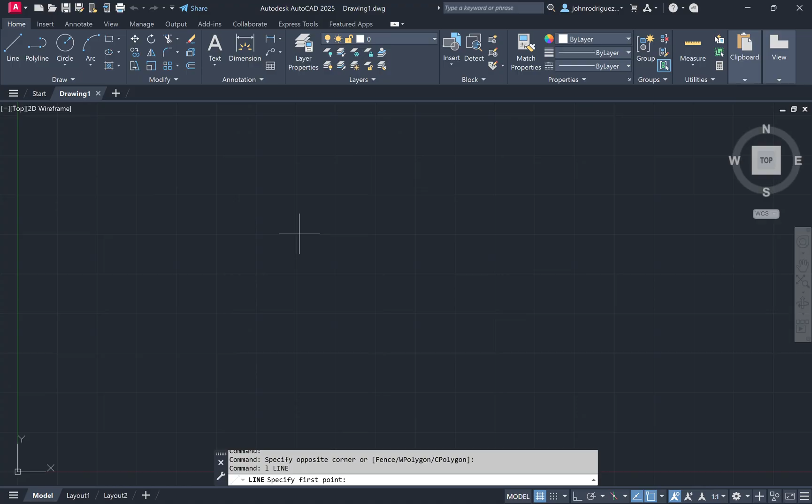For drawing 8, support bracket, the auxiliary. We're going to start with the front, top, and right, and then see if we can get to the auxiliary view. Line command, and we're going to draw the top 2 lines of this front view.

Turn ortho on. I'm not going to do any math. I'm just going to go over 30/16 because it's 15/16 two times. There it is. And then I'm going to go over 3/4. Okay, if we end up with 2 lines, we want to be neat.

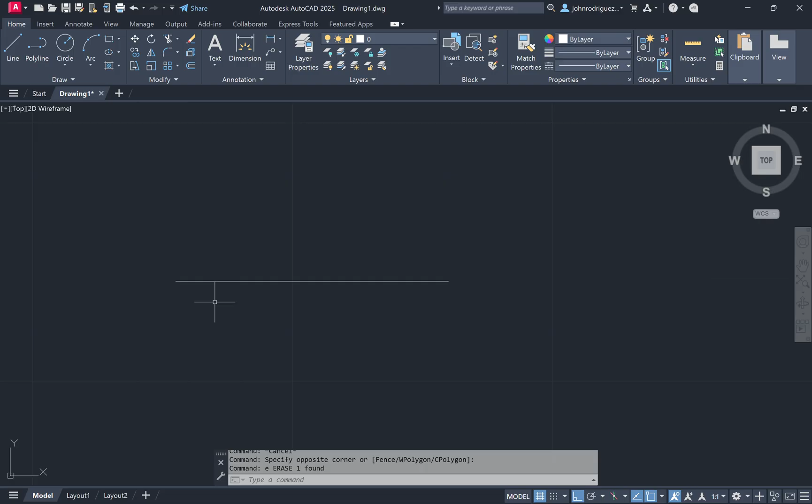So I'll just use the grip here and make this go over to that one and get rid of the double line. Alright, line command here. It goes over 2 and 7/16. Press enter, and then I'm going to rotate that.

If you know the polar method, use the polar method. Rotate that down -30 degrees. I'm going to use offset. My distance is 3/16.

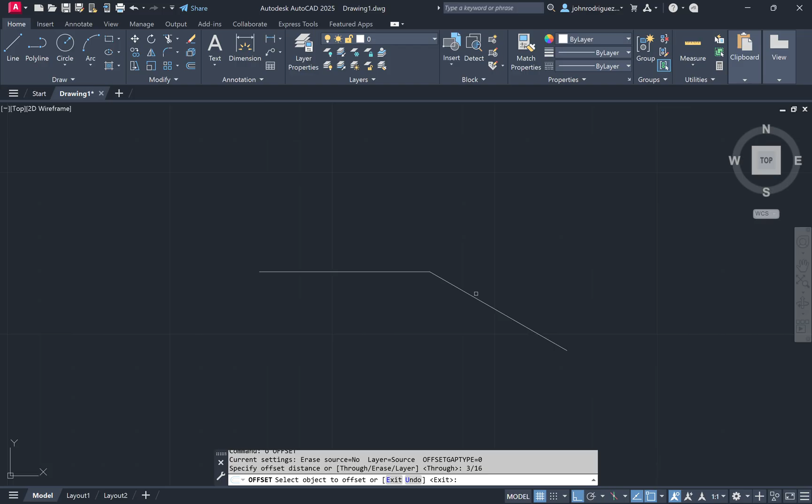I'm going to close this gap here. Let's trim this. Close this gap here.

For the chamfer, it is 3/8. So I'm going to offset 3/8. Wrong way, let's go that way.

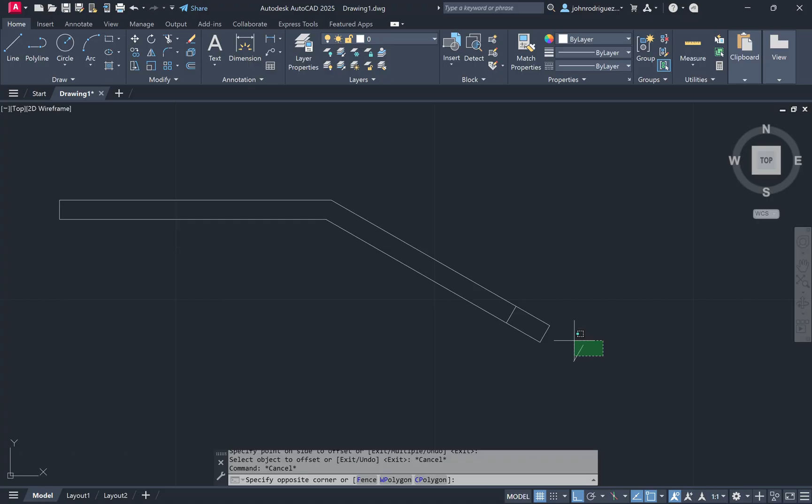Let's move this one, we need another one of those. If you didn't make that mistake that I did, just copy one of these back here. This is okay because we're going to get rid of this line in a second. But we're going to offset that, and this is for the back of the hole.

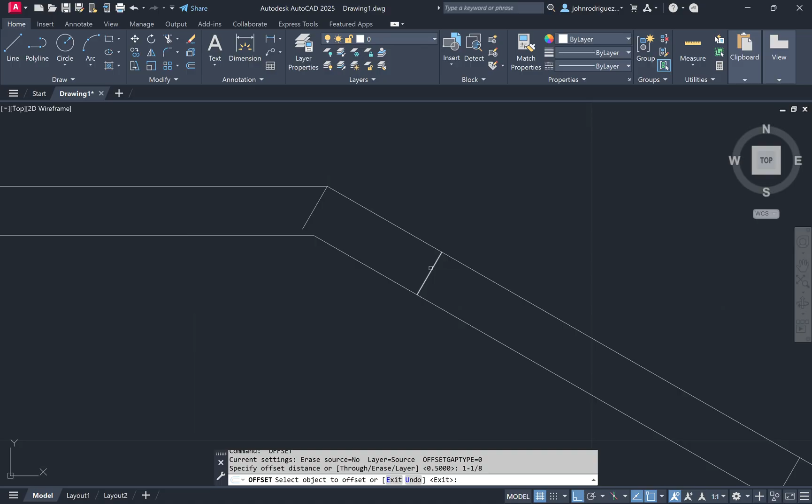It's away up from the top, 1/2 inch. So I'm offsetting this 1/2 inch to the right, and then get back into offset 1 and 1/8 this way. Now we can get rid of that.

We'll worry about the hidden lines for the holes later. If we want, we could change that to hidden now. Let's just make sure we go over that.

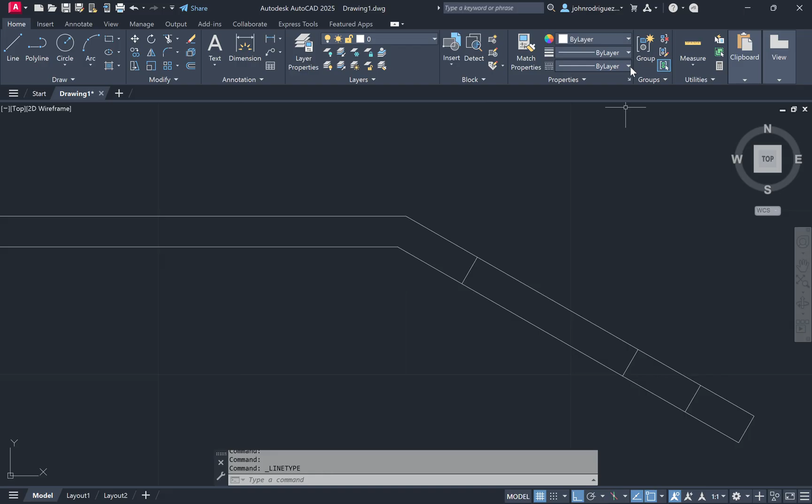Go other, load, hidden. Sorry, actually, there are 2 ways to do this, and depending on the next lesson I give you, maybe we're going to do it another way. Alright, let's just keep going.

I'll go back to that. Alright, I'm projecting up from this corner. This is going to be over. I'm just going to do a line from this. It was any length, right? 30/16. I'm going to offset this 1.5 down.

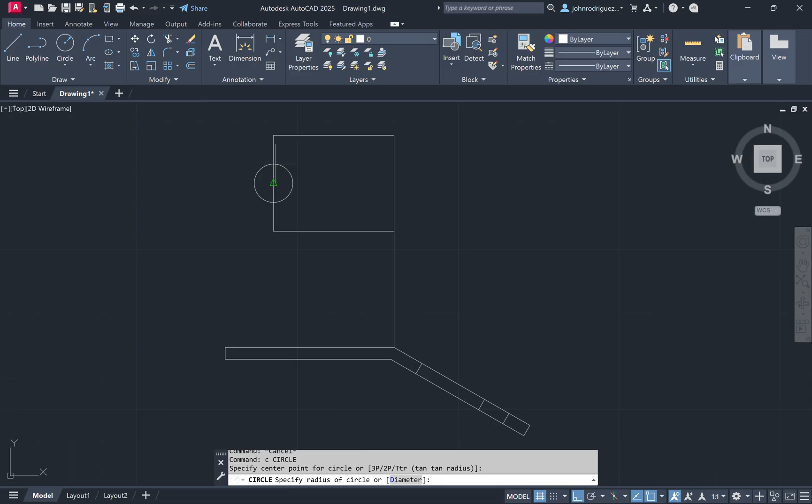I'm going to do a line here because I'm going to have to trim that circle anyway. Circle from that midpoint up to the top. Trim command, get rid of those 2.

I'm going to extend from this corner, the end of it, up. Wherever that is, I'm just going to extend these 2. That's the end of the shape.

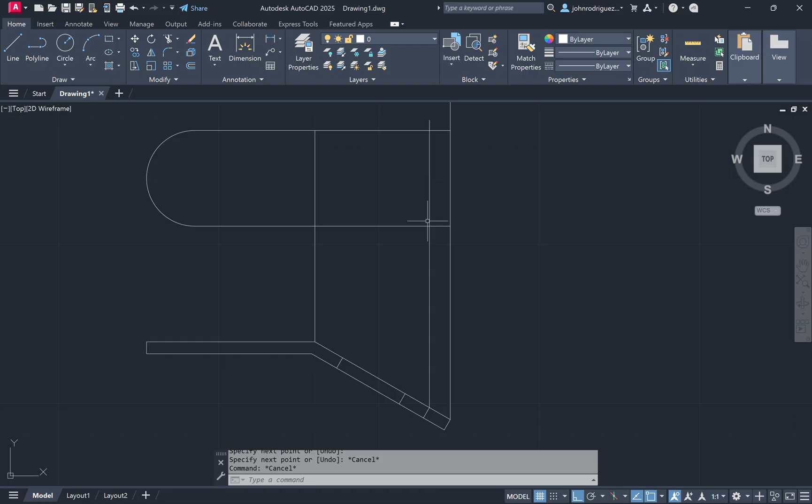Okay, then I'm going to extend from this corner here up. That's going to be where my fillets, where my chamfers start on both sides. Then I'm going to go line away from this corner up 3/8 and connect.

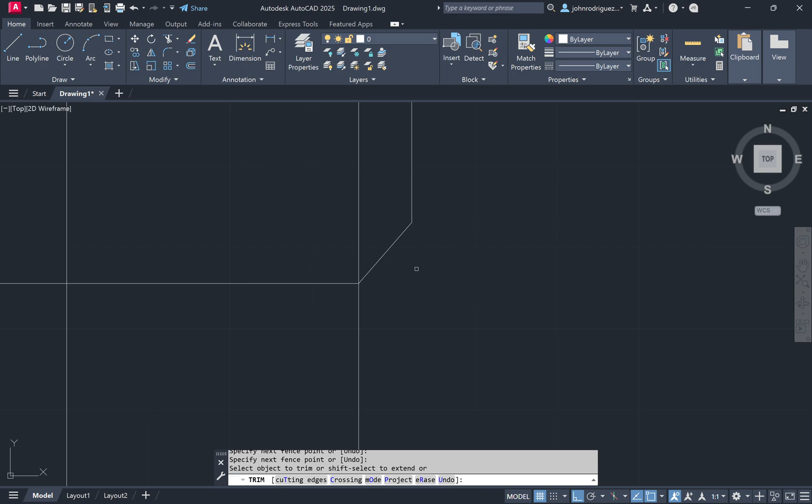I'm going to mirror this to the other side. I need some midpoints, so I'm trimming this out now. Mirror this away from here to there. Then we could trim. Right, we could get rid of this.

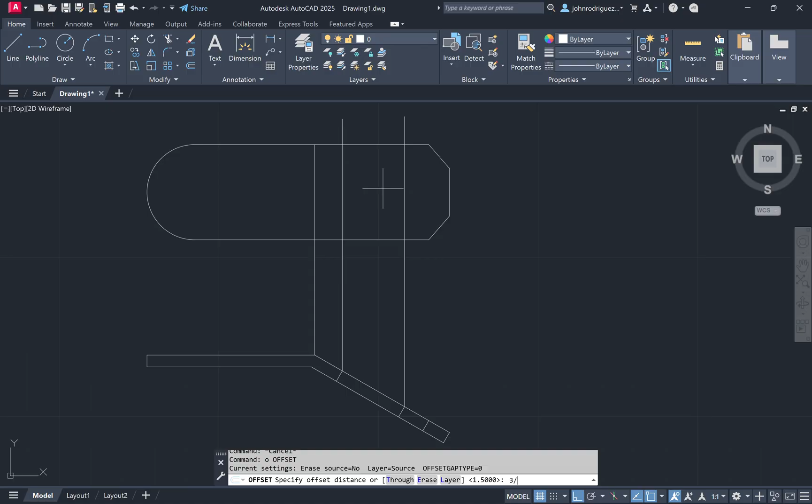Then for the whole top of this to the bottom of this, notice I'm dealing with the top of this side first. And then I'm going to deal with the bottom because that's going to do other stuff with the top view. Okay, then we can offset 3/8 from the top down and from here this way.

Let's start cleaning this up. Trim this out, trim this out, this. Let's go in a circle and get all of these out. Okay, let's get this circle, the 2 circles here.

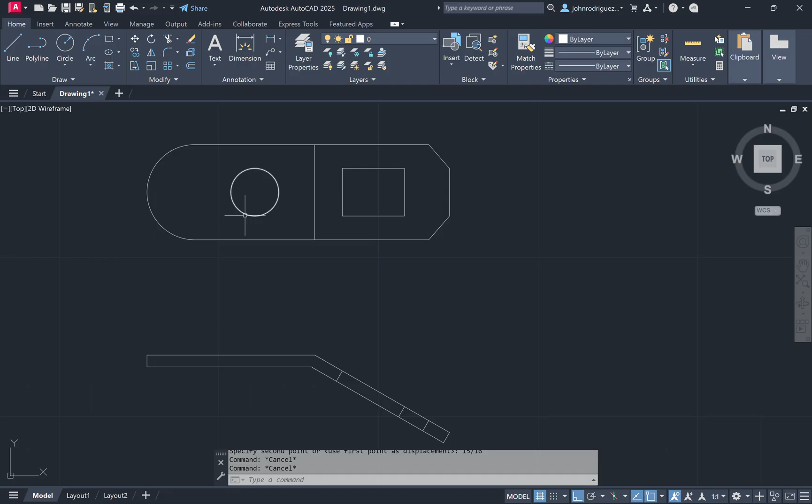I'm just going to do one there, diameter 0.75. I'm going to move it over 15/16, and then I'm going to copy this over 15/16. Alright, we can bring this down.

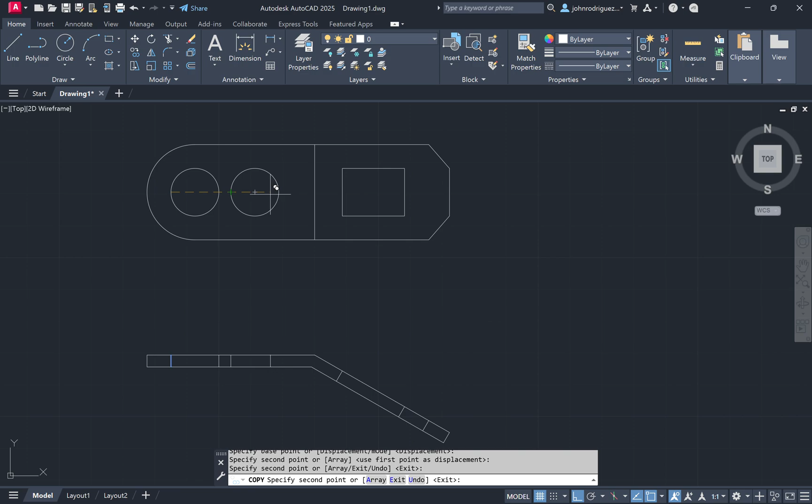And that's going to tell me where my hidden lines are. Trimming this out, and I'm going to take this, copy it from here to here to here to here. Alright, there it is.

Next, let's work on the right view. Actually, no, let's keep going with the top view. We want to get the hidden lines that go under here. Darn, let's see.

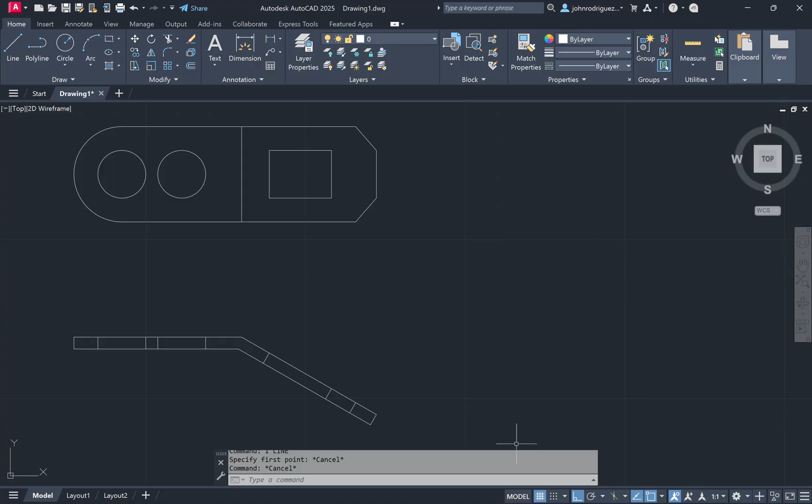We should be applying what's called layers. Yeah, we're going to go over that lesson soon enough. Let's just do this now.

Layers. We're going to type in LA, and then we're going to click a new layer. And then we're going to call this object. Press enter to type it to create a new one. Construction. Enter again, or click this icon for a new layer.

Hidden. Enter again to do text and dimension. Then I'm going to change my colors. Object is cyan. All of this is going to be posted, so you guys should be able to create this.

Construction is yellow. Hidden is going to be green. Text is going to be magenta. And dimension is going to be red.

Click OK. And then on the line types, construction, on the line type, I'm going to click there. I'm going to hit load, click in here, and press D for dot. I'm going to go to dot, not dash dot, regular dot.

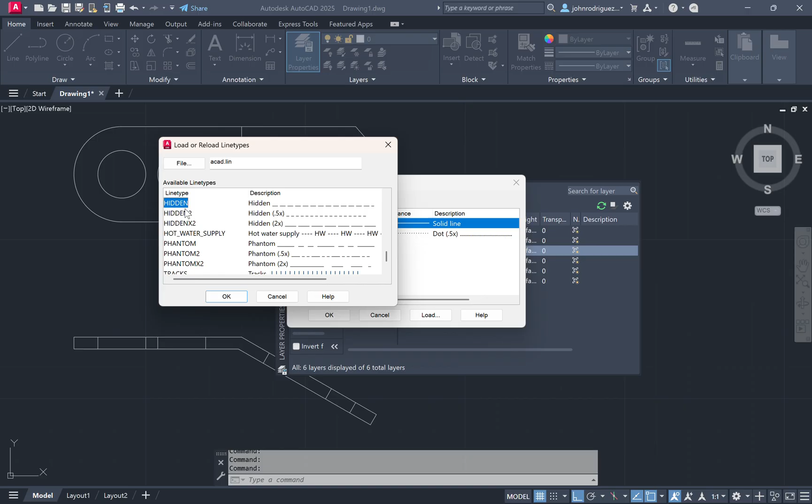Set the scale to 0.5. Click OK. Now I'm going to load the hidden linetype. Click here, type H for hidden, select my regular hidden linetype, and click OK.

In construction, double click, and I'm going to set that to 0.5 or 0.2. Hit OK. For hidden, I'm going to set that to green. Hit OK. Now our layers are set up.

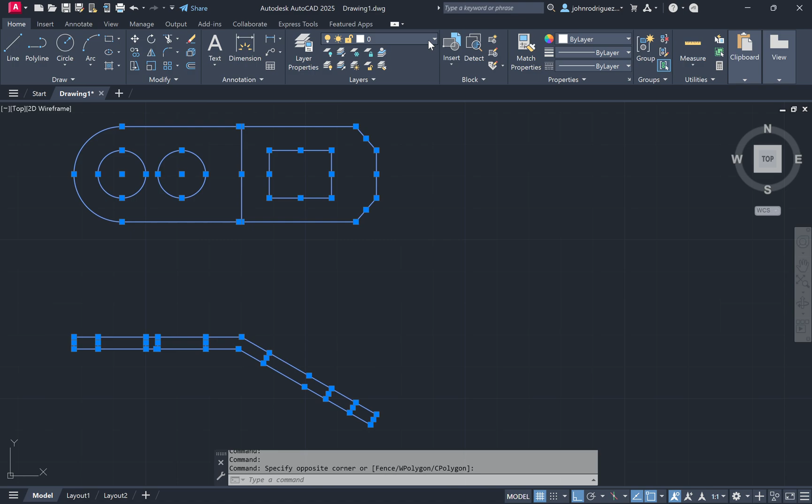I'm going to select all of this and put it on my object layer. Next, we have some hidden lines. I'm going to select these and put them on the hidden layer.

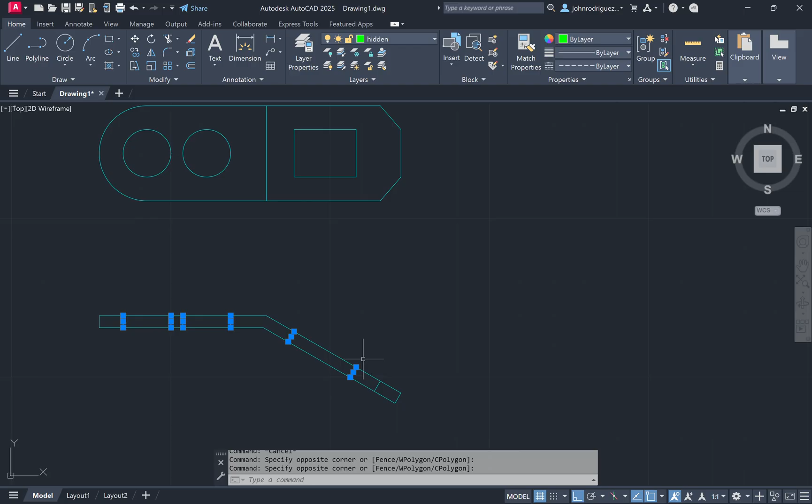This screen does not like me clicking out here. There we go, on the hidden layer. Notice if it doesn't show up, we might have to change the scale for those specifically. So I'm going to select them, hit MO, and over here let's make them a little smaller. Let's try 0.5 - that looks good.

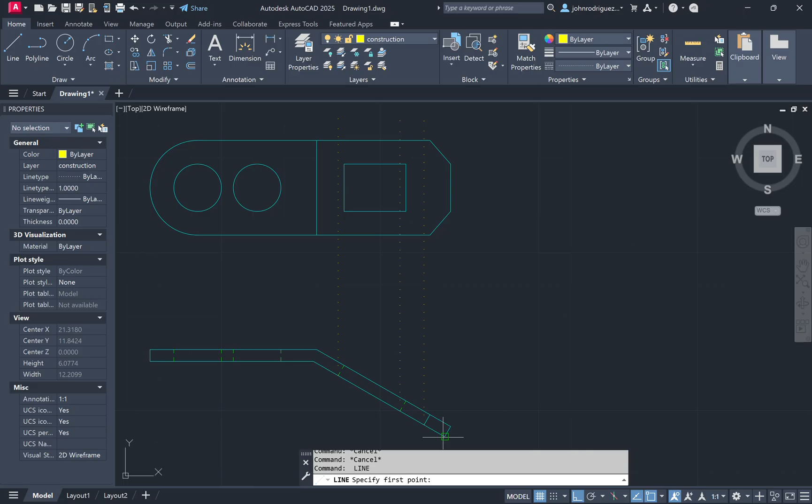We've got 2 lines, good enough. Now I'm going to switch to construction, and I'm going to start projecting up from the bottom. The bottom is giving me different things, okay.

This is going to tell me where my other hidden lines are. So I'm going to switch to hidden, and I'm going to have a hidden line from here to here, across and over. I'm going to have hidden lines from here to here, over and over, and from here to this intersection.

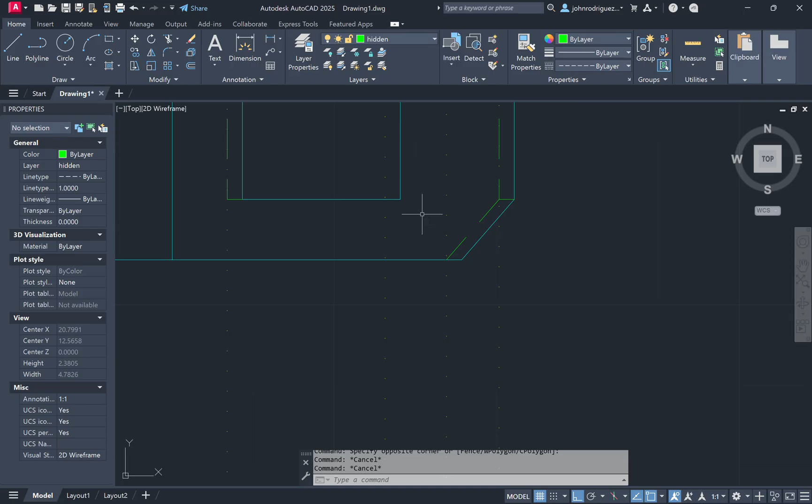These little short lines, we want those to be smaller so we can see them broken up. So I'm going to do match properties, MA. Click on one of these that I already set up, and click on the little ones. If it doesn't show, that means they're really short, so let's make them show.

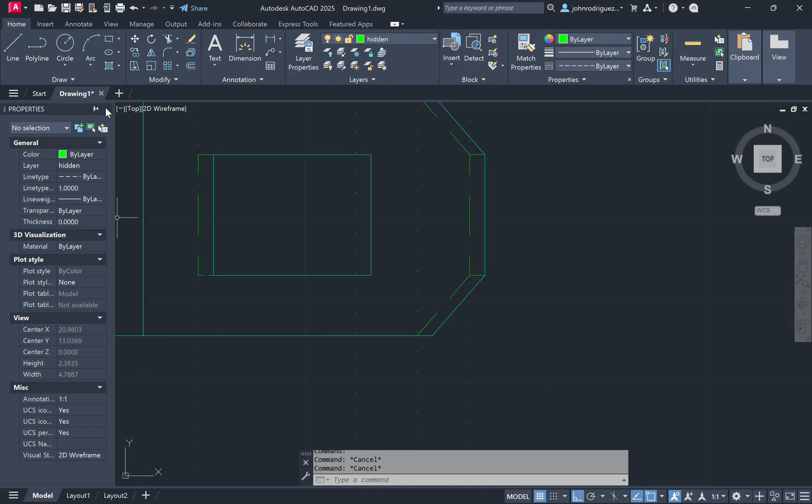Let's click and try maybe 0.3. See if that works - nope. Let's try 0.2 - 0.2 is good. I'm going to take out my properties, do MA again, match properties, select this one, and do these little guys. Okay, now they show.

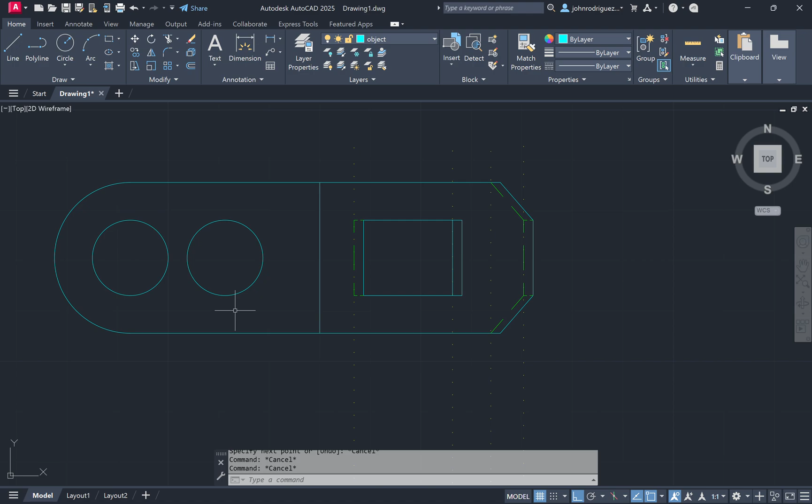Notice we have a line here. That means we have another line that should be there. That's going to be our object line. We're going to do a line from here to here. And there's your top view, there's your front view - these are properly done.

I'm going to switch to construction and project over, and here, and take care of just a little bit now. If we want to be most correct, do we want to be most correct? That might take a little more time. Yeah, why not - no, let's do it this way.

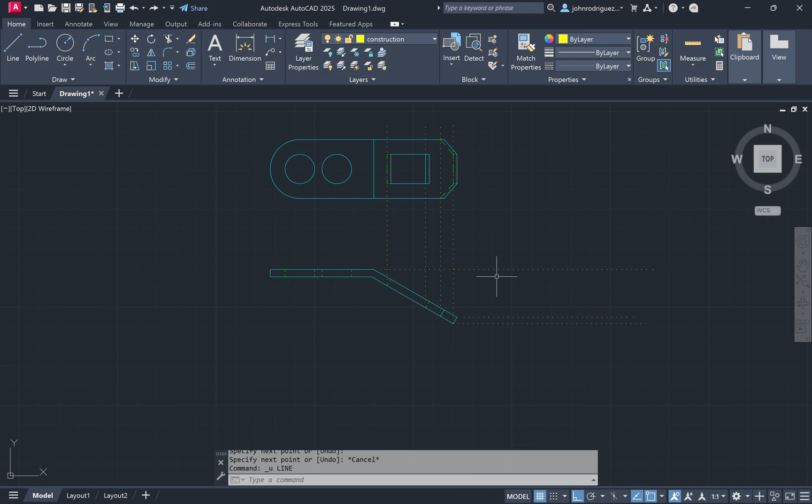Okay, and then I'm just going to do a line there. No, let's be most correct. We'll do a line from here - this is our miter line, and I'm just going to put it at 10, angle 45. Okay, and I'm going to project from here to here.

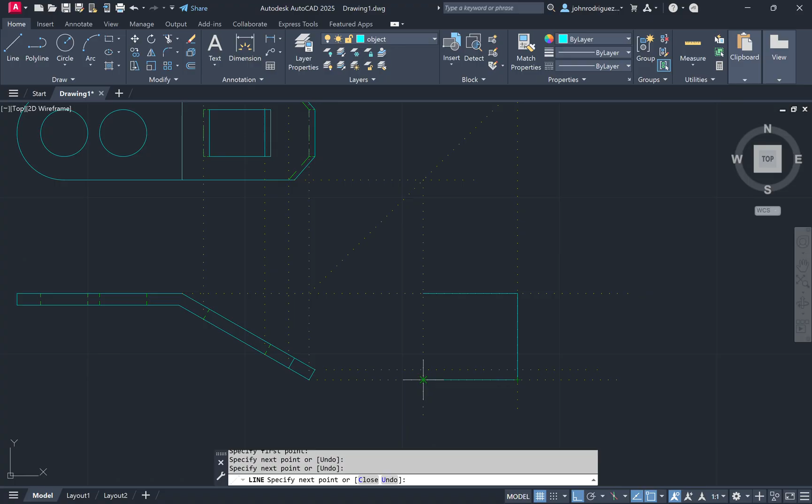And there, and I'm going to bring these down. That's going to outline my view. Switch to object - let's draw our outline here, here, here, here, and here. We're going to fix that a little later.

Okay, we've got to handle first - let's keep going. Let's get the top of the hole, the bottom of the hole. These things are visible. And we've got our chamfer, and the chamfer is here and here. This is going to get funky and confusing.

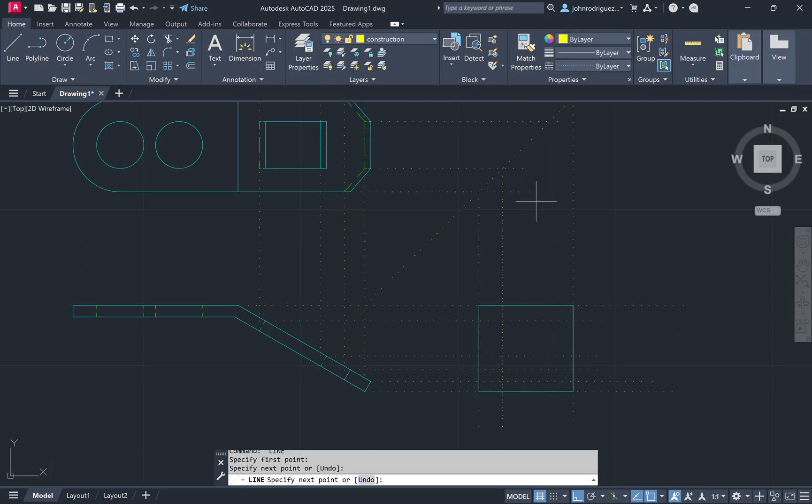Wherever they intersect the miter line, I'm coming down. Okay, so don't get lost, don't get lost. We've got an object line. This is the top of the hole that can be seen. And then if I trace, this is it, right? This is the bottom of the hole.

Okay, now our chamfer is here, right? First off, this is the top edge that we see, so it's from here to there - that's what I traced. Same thing on this side, from here to here and there.

Then we have a line here and here, a line here and here, and we could trim these out. See, we've got some overlap. So what we could do is maybe just turn off - we could use the icon to turn off the construction lines. That way we could trim.

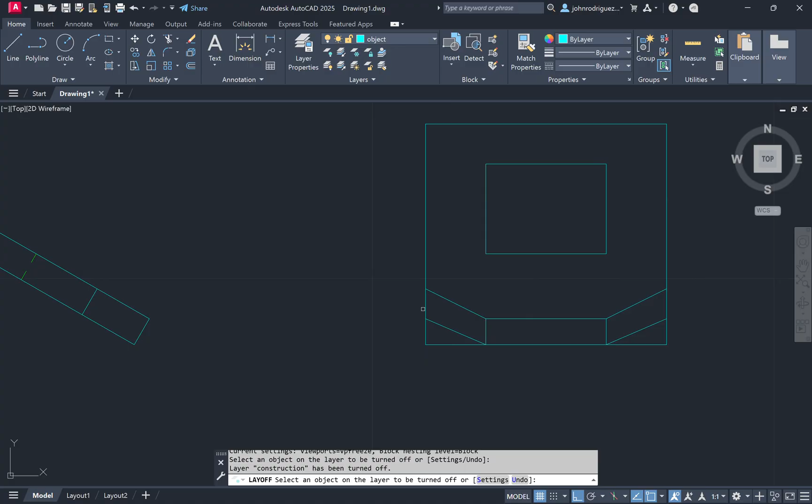Okay, so there's our view. We've got maybe one more line in there - that's going to show.

Let's use a construction line, and that's from the back. This is going to show inside, so we're going to do a line inside, right? This is everything that is visible on the right view.

Now let's do some of these hidden lines, which is not a lot, right? It's going to be the bottom of this edge. There's one. Okay, don't get confused. So we're going to do a hidden line from here to there.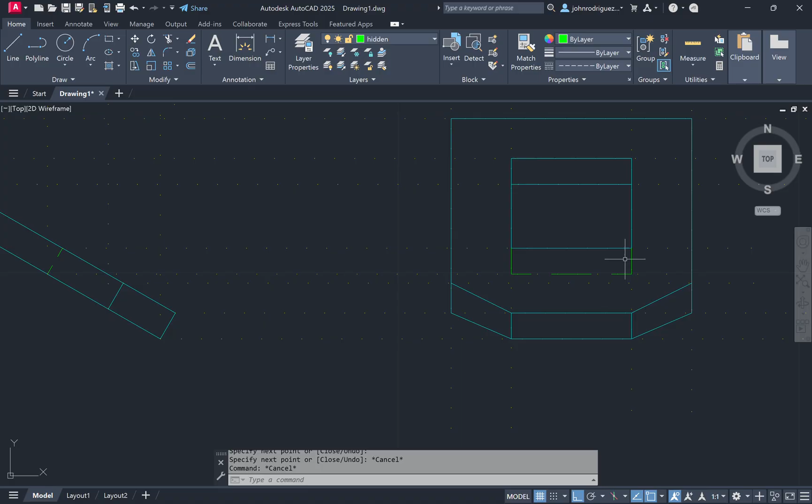Again, we've got short lines. So if you want, do MA, match properties, click one of these that's already set up, the green one. If they don't show, then we know we need to use maybe the same scale as the little ones up here. So I'm going to match properties on the little ones up here and do it on the little one here.

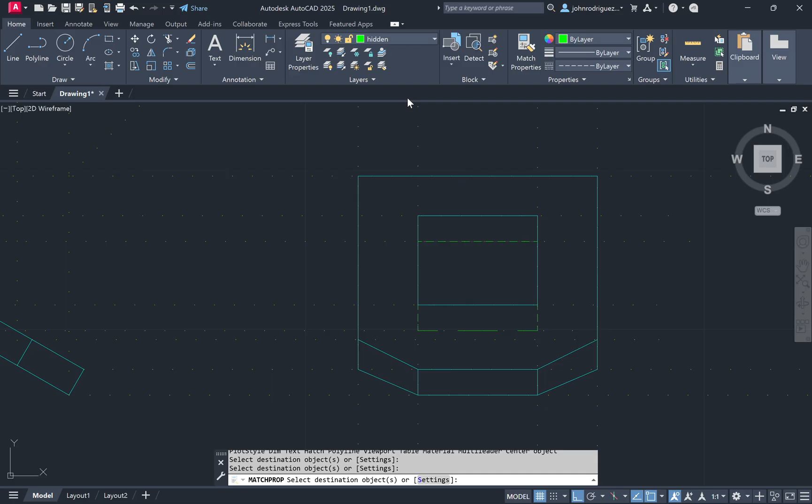I just want to be consistent. I don't want to have too many different hidden line scales. Okay, we've got another hidden line here. And that's going to be, we haven't projected from that because I don't want to drive us crazy yet.

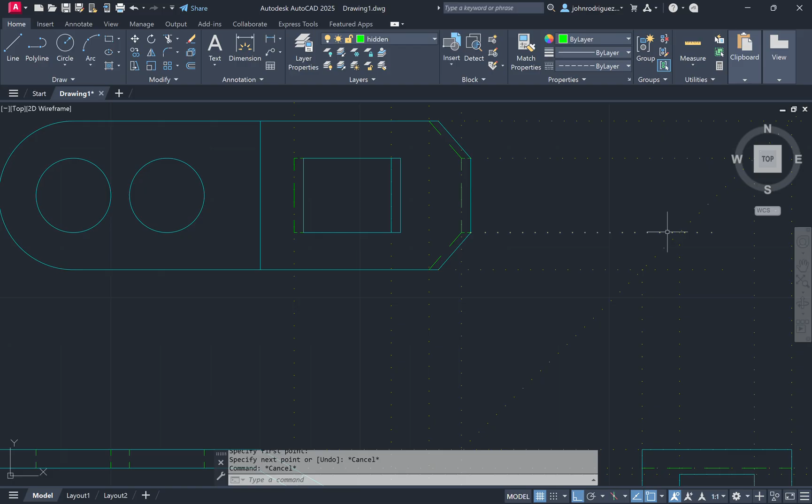This is for this back edge, the thickness of this top plate. So we've got a hidden line. We'll do a line from there to there. And the quadrants happen to line up with the hole, so we already have lines projecting for that, which means we have hidden lines here and here.

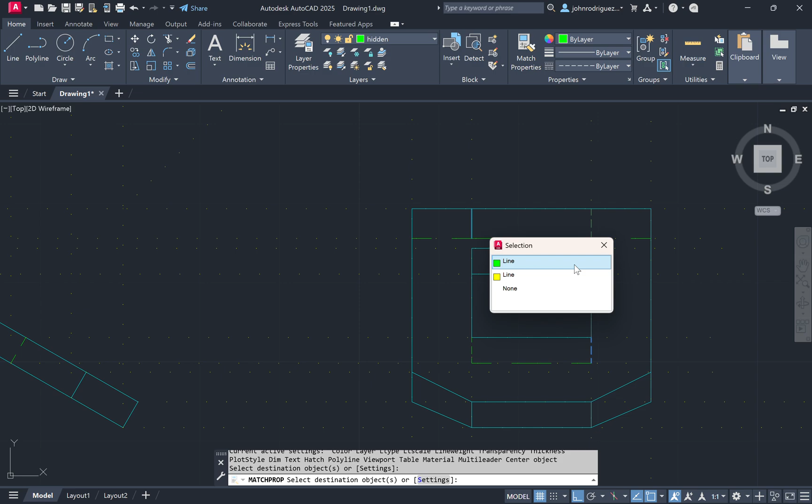Again, too small, too big of a scale for the hidden lines to show. So I'm going to do match properties, MA, choose the little one. I'm going to do that here and here, and I just want to see what it'll look like if I do that here.

Take a look. If we can, let's just match all of them. So I'm going to do that to all of these. That looks a little better than having them all different. Maybe we could go a little bit bigger, but yeah, you guys can change that later.

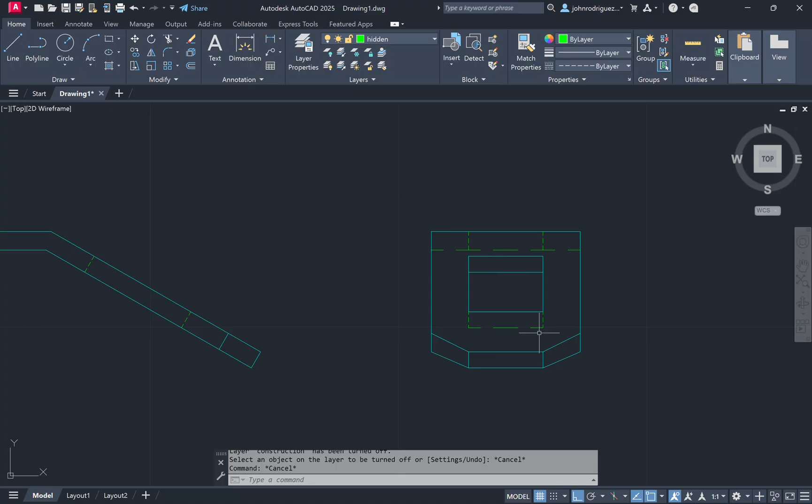Let's turn off the construction layer. There is our right view with all of its hidden lines. Here's our front view, all the hidden lines. Here's our top view, all of the hidden lines.

The auxiliary view, I'm going to go switch to construction. Actually, that's going to be a hot mess. Why do that to ourselves? Let's leave construction off.

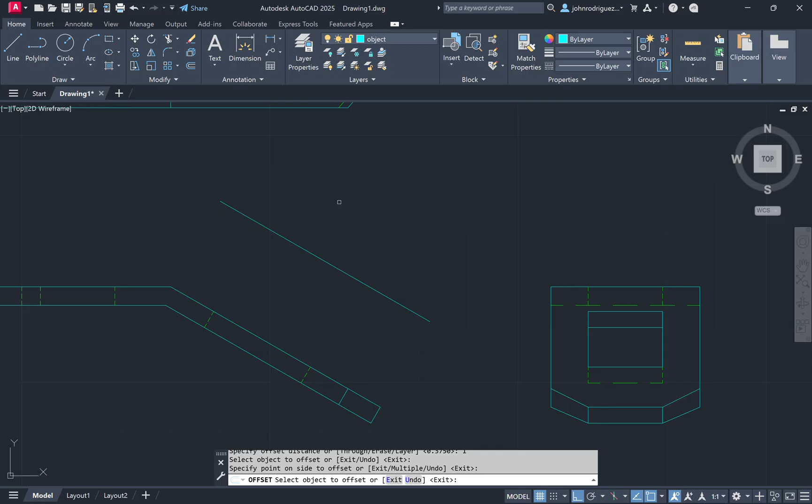Make sure you're on a different layer. I'm going to switch to object line and turn construction off. I'm just going to offset 1 inch away this top line. Okay, this might not leave us enough space, right?

So we're going to cheat a little. I'm just going to move this up maybe 2 inches, move this over 2 inches. Make sure you move both the same amount, just to give us space. The construction lines will be off, but we don't need those anymore because our 3 views are done.

Okay, we offset that distance, and then we're going to offset again 1.5 for the width of the shape. And here's a little trick.

I'm going to copy this line from here. This is one opening, the bottom of the opening. This is the top of the opening.

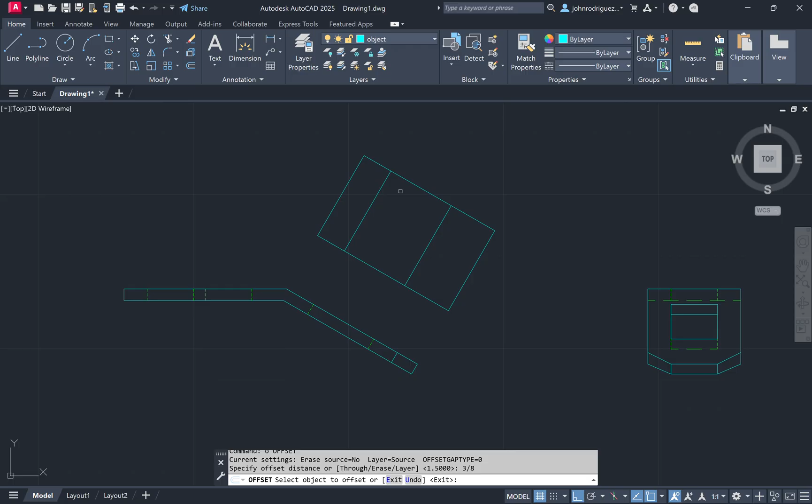And then we're going to offset 3/8 from here to here, from here to here. And let's do 3/8. Oops. From here to here.

We're going to draw a line there and a line there. And then let's trim out a bunch of the stuff we don't need.

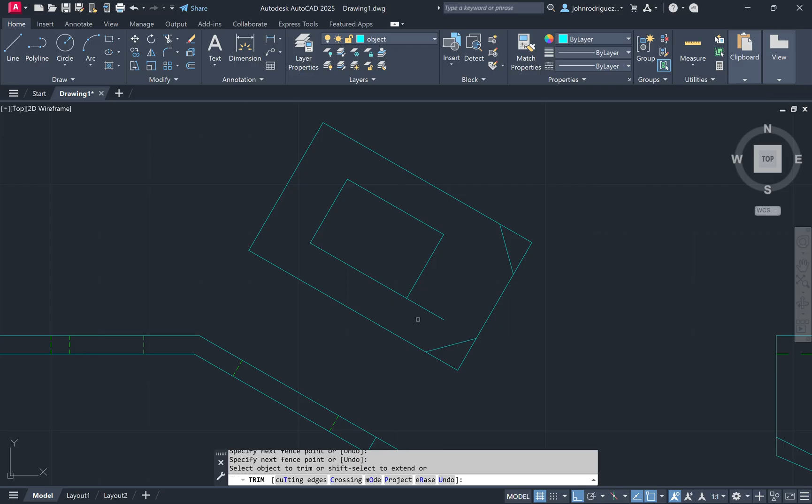Okay, and there is auxiliary view, our front auxiliary view. Okay, then all that's left is dimensions and labeling the views.

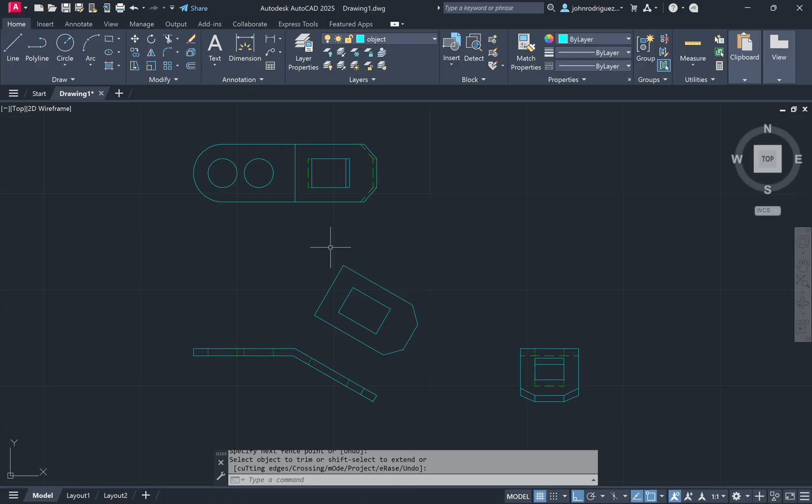All right, so we need a width, and let's put that on the dimension layer. Width from here to here. Just bring that straight down.

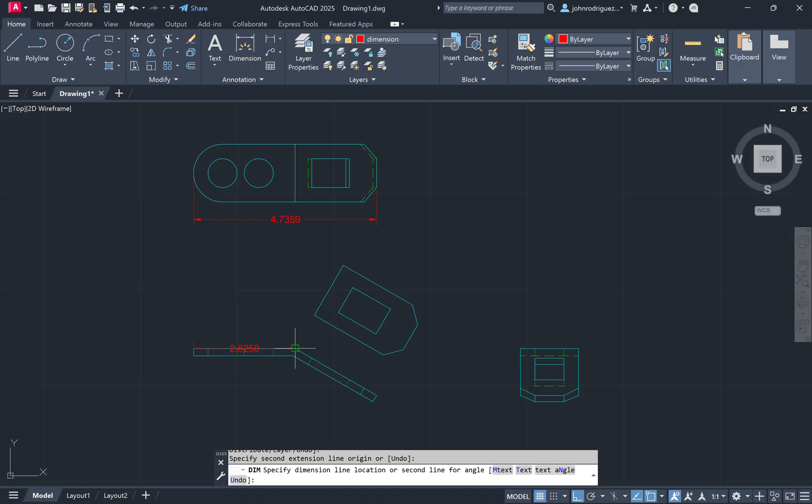We are going to need a width or length for this top piece, and then we'll put it in a good place, right? Mind you,

let's turn ortho off so we can get a diagonal. Right, I'm trying to match the distance. Eyeball, you could type a number.

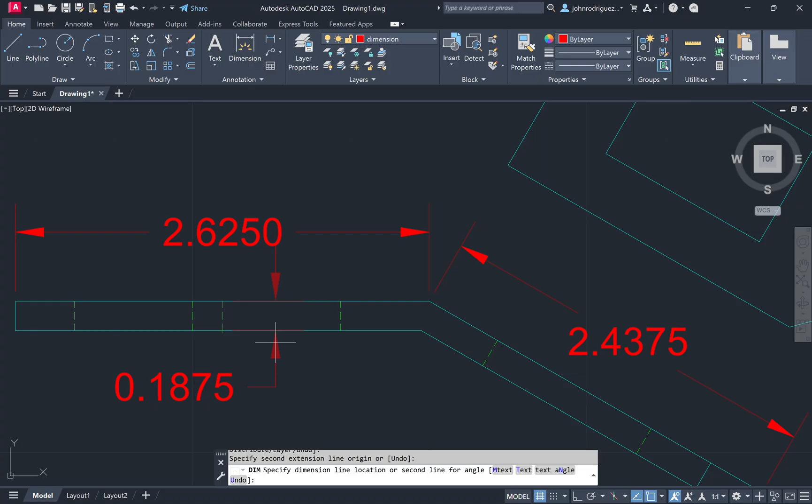We want a thickness, so we could click, where's my midpoint? I could click there, and then just bring it out a little bit, just so that it's away. The arrow's keeping it away from the number.

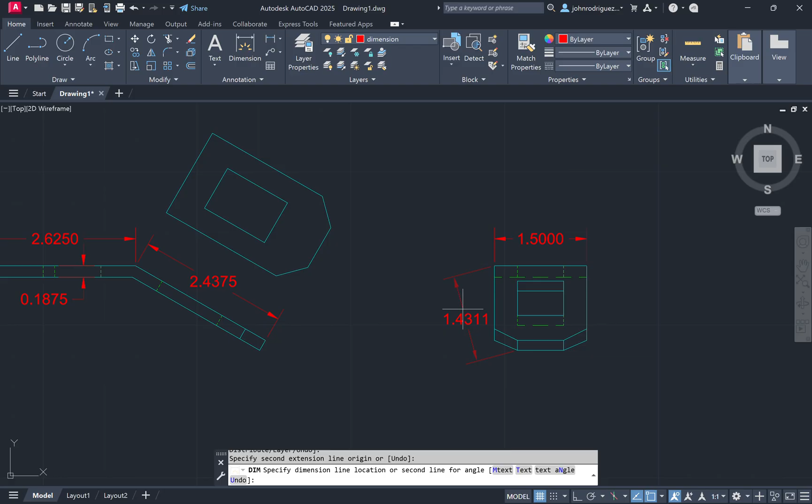Okay, and we need a height and a width for the right view. We could click here to make them match, and a height. So click there and the bottommost, and then bring it over to the left. Move it up a little bit.

Okay, next. Lastly, we're going to do text. I'm going to switch to the text layer, and I'm going to do MT, multi-line text. And I'm just going to line up from here, drag down,

create a window. Let's caps, top view, highlight, underline, make sure our text is 3/16 tall, close, and then I'm going to take this and I'm going to use the copy command.

And from this corner, right, where these two line up, this is the imaginary sharp corner. That's where one is. I'm going to do the same thing here. That's that imaginary sharp corner. Click there. Same thing here.

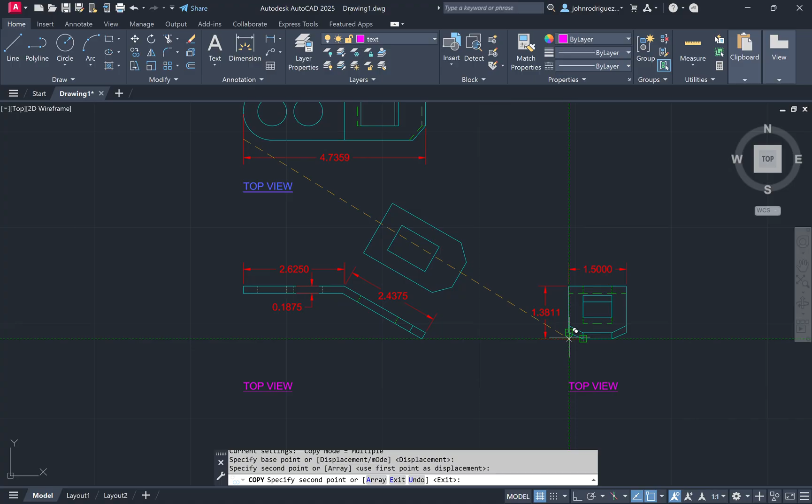Okay, and then we're going to double click and edit, and we'll call this front. Click outside, double click here, right,

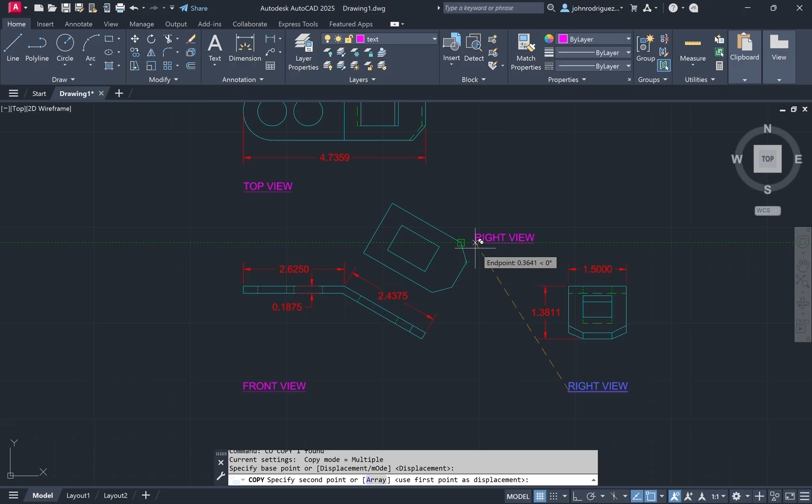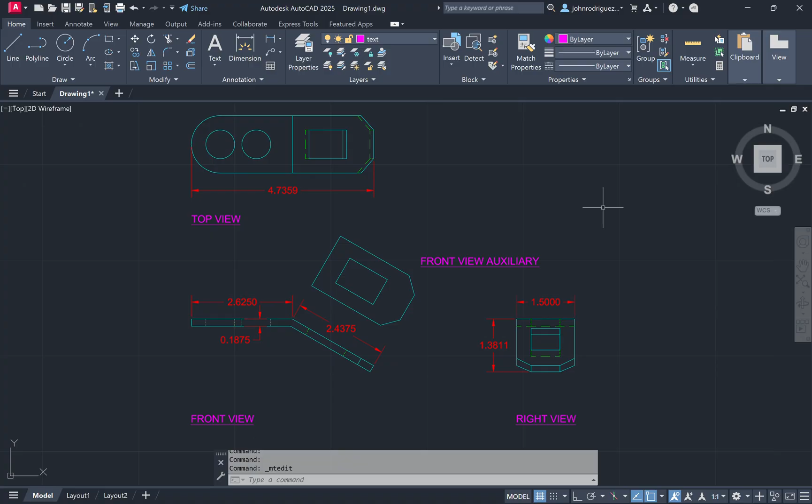Alrighty, and I think we're going to call it for this drawing, that is drawing 8, support bracket with an auxiliary view.